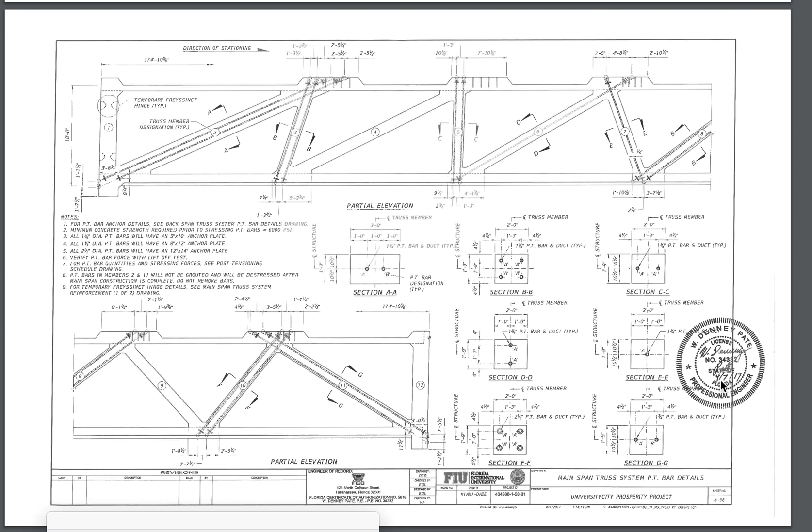They do have an umbrella as a canopy. I've got so many things that I find wrong with these bridges. I said in the 2016 drawings, and that's all we had, that I'm the only guy that was out there complaining that the canopy didn't have enough structural support. And sure enough, it appears that Louis Berger came along and corrected, if you will, Denney's plans and made them put 2 additional post-tension longitudinal members in.

So I think these are shear walls, and after the bridge is finished, this shear cabling can be removed. It's kind of simple as that. Let me say a couple other things too. The 1, 2, 3, 1, 2 — notice that, what I just did.

This is the change of direction of forces in this bridge. Between these two right here, number 6 and number 7, forces are changing directions. They're going this way, direction to the left and then direction to the right. As you can see here, between number 8 and 9, this member 9 is forcing directions off to the right, and number 10 is forcing directions into the pylon section, and then number 2 is forcing direction into the abutment. Now this may look like a crazy angle.

Let's address that. The loads applied, the forces between these two are forcing this direction on the, from this guy, number 4. When the force is applied here, this is on a slight angle, which forces are driven down, and it's on an angle, it's going to drive it that way.

Imagine this as a spring. Imagine a bottom deck as just a spring, a long coiled spring. And as you put forces on it, imagine how you're pushing away.

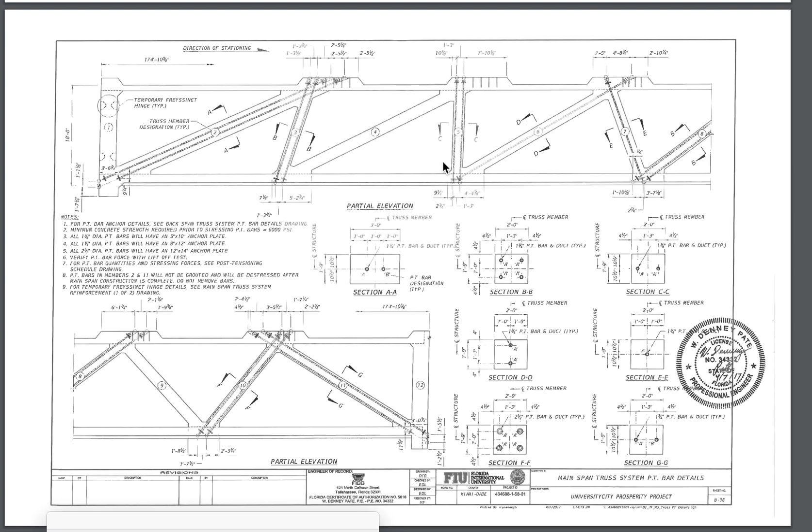Okay, this is the one that's my really iffy one, bone of contention. And of course, I hope they did some crazy scale model of this 30, 50 feet big and played with it. I just don't know, you know, why didn't they brag about it? FIU is a structural engineering college. They just put their hands all on this. I don't think they got out of not putting their hands on it.

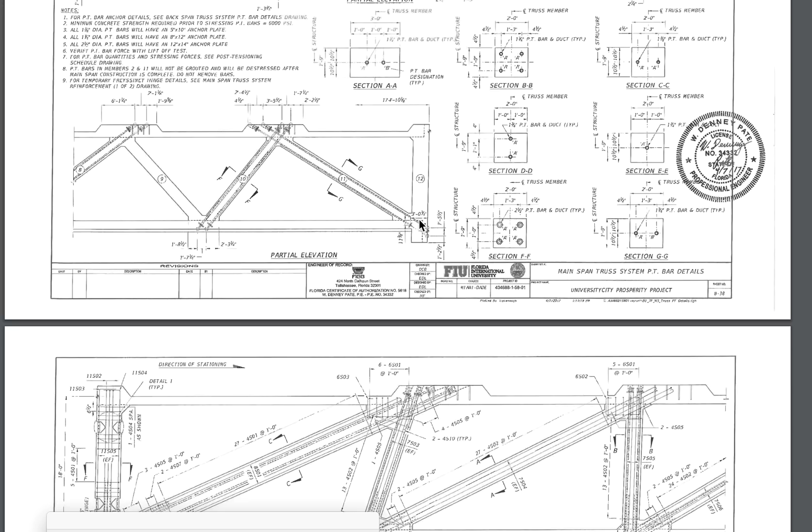So this, I think, is just shear bracing, and you can remove it after the fact. So the load comes down between these two. The load pushes over to the right. It's resolved by the abutment, the pylons, and the other bridge being abutted to it.

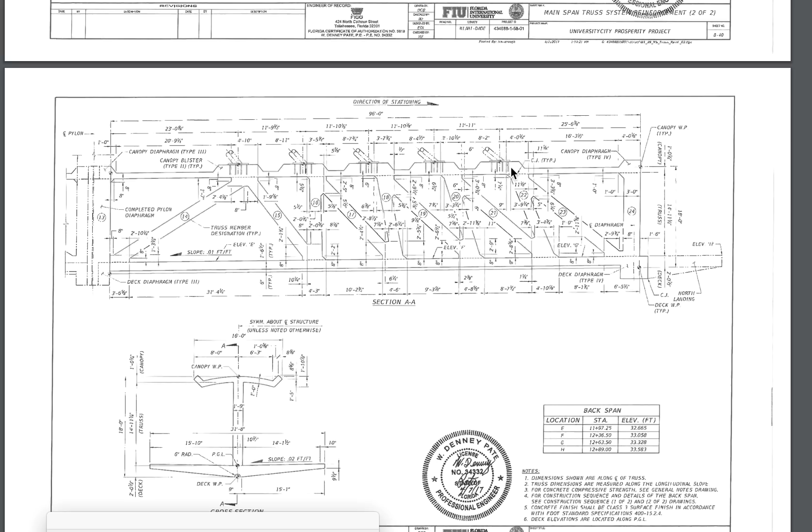I want to scroll down and show you one more thing here. This is the bottom of the other bridge, and this would be the cantilever for where the elevator, etc. is. And we see the pylons are going this direction, so that's where it would wind up at that point with the structure. And again, some of these are just designed to hold the bridge together as it takes wind and forces and direction of all the forces.

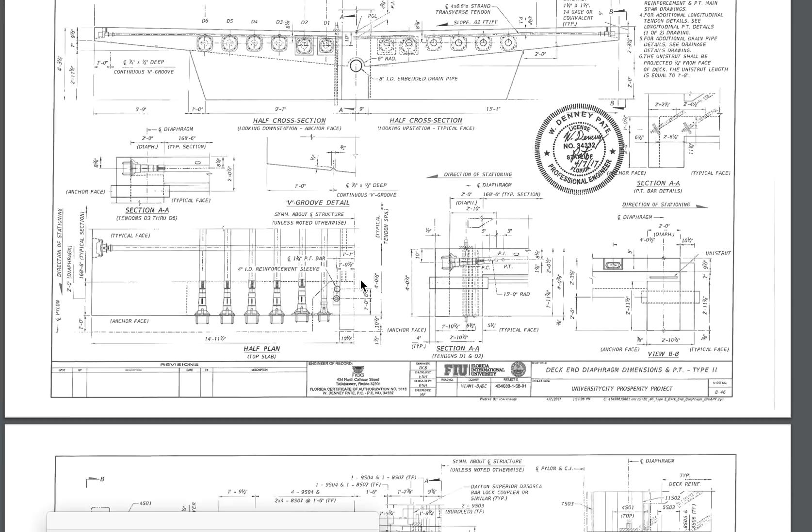Now let's go on, and I'm not going to be too specific. This is about the 4th time I've attempted this video, so I'm trying to refine it down to something real fast. And I'll end it with the blister bar and the loads and the other possible common defect that could show itself.

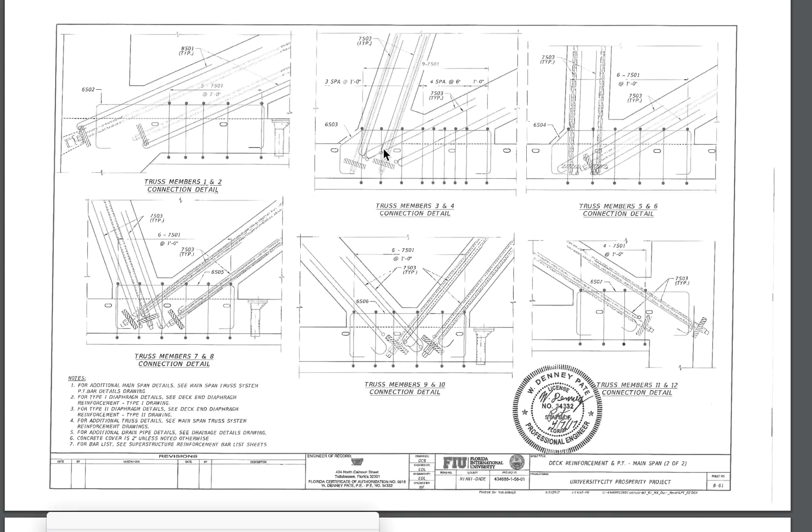Here are the connections. This would be the forces coming down, sliding also. This would create a shear moment. Actually, in the blister bar, in the post-tension member itself, and I say member, I mean the literal bar, as it's being driven, and it would be at the connections also, where they're being driven, where they come across anything stationary, the concrete, especially during wind and movement. They're going to have a lot of vibration and racking going on.

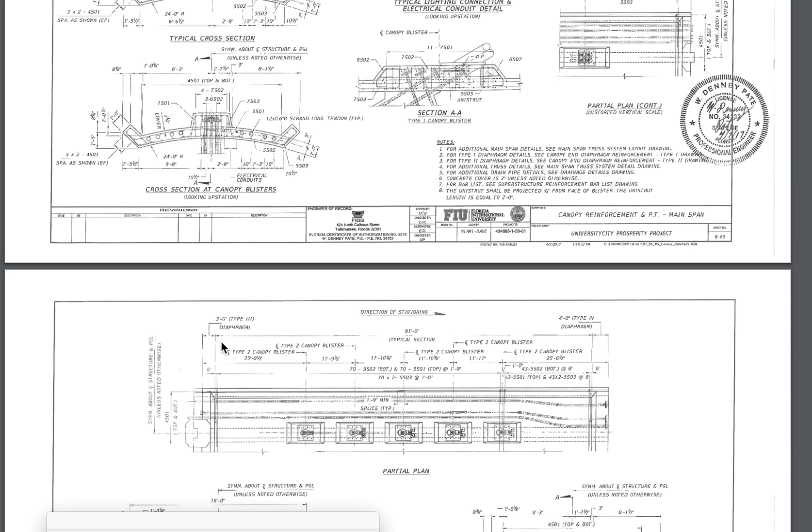Okay, sliding down, and this does have connections for that supposedly. Here are the blister bars. The blister bar, some of them line up perfectly, and this would be this one lining up, well, ideally in the center, over top of the two supporting members. Now, all bets are off if this bridge was capable with the longitudinal post-tension cables, able to take the entire load of the 16-inch pipes. I don't know if that was possible with this design.

So the load comes down, and if the blister bar is separate also, if it could be made as one, that is structurally sound, like a steel plate, if you will, just like this steel plate here of the 16-inch pipe. If it could be made that if you push down on this blister bar it acts as one, well, then the forces come out here. The load of this comes out to each end of the blister bar. This is a 12-inch deck, so that comes out to the 8,500 psi decking along with the reinforcement that's in that decking.

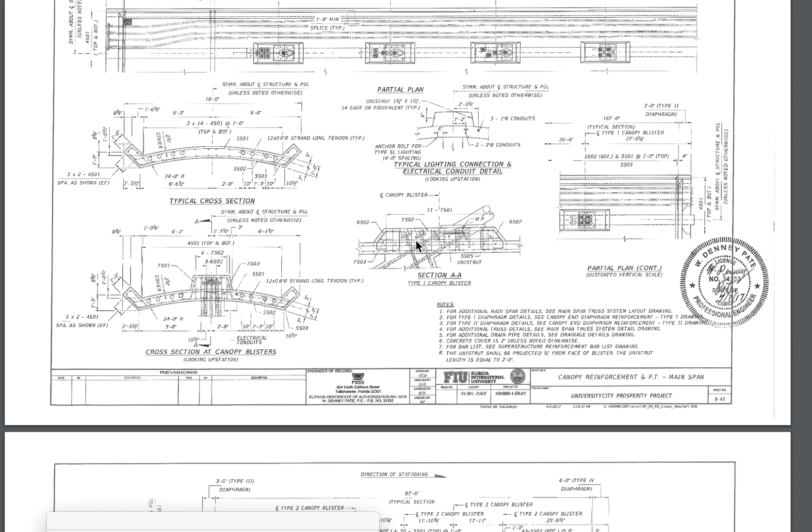With that said, it also has to be driven down as one, and that would then transfer the load onto these columns equally, but offset nevertheless, because this is not in the center of, ideally, the crisscross area of this, where these two meet. So you do have a cantilever effect, action going on here, which is another point of tension being created right under here. And ultimately, these forces have to be canceled out with the supporting member, which would be another shear force, a shear point, if you will. And that's it. That's all load paths.